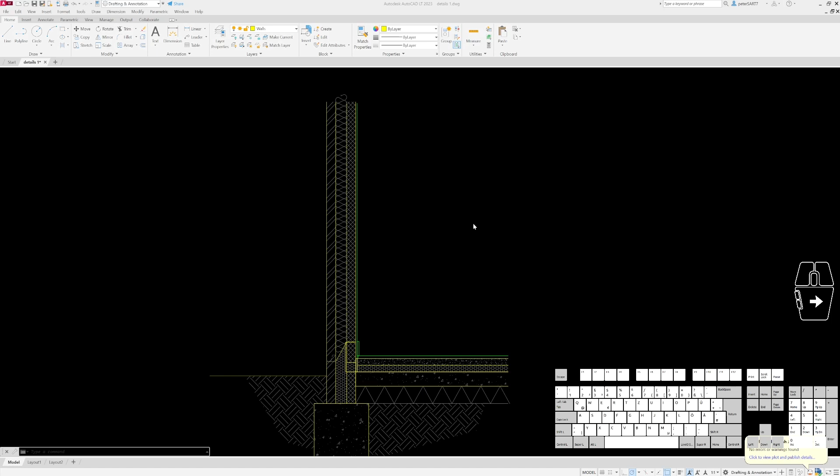This time we're going to look at roofs. There are primarily two types of roofs, a cold roof and a warm roof. And in this one we're going to look at cold roof, so we're just going to draw a very simple pitched cold roof. So bear with me because this one does take a bit of time.

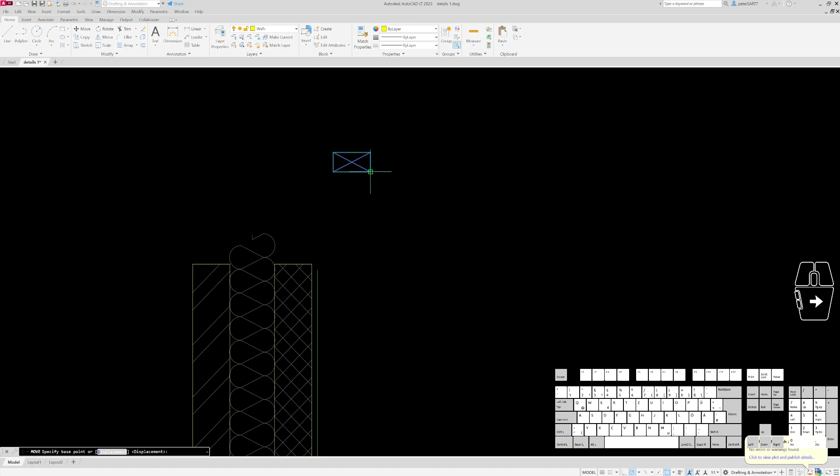So first we're going to cap off our masonry walls. Then we're going to draw a wall plate, 100 by 50. Make it a slightly lighter line weight because it's not masonry. Roof joist, 150 high. It's an elevation, so make that a lighter color. This will be plasterboard. Offset that 15. Draw the end of the joist.

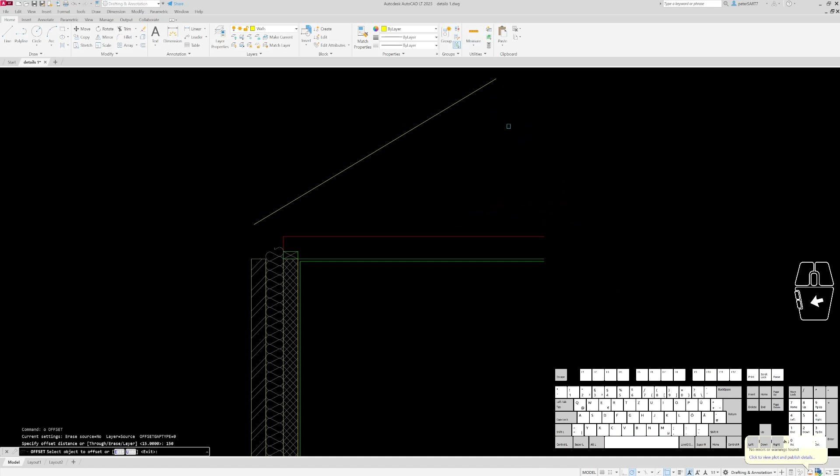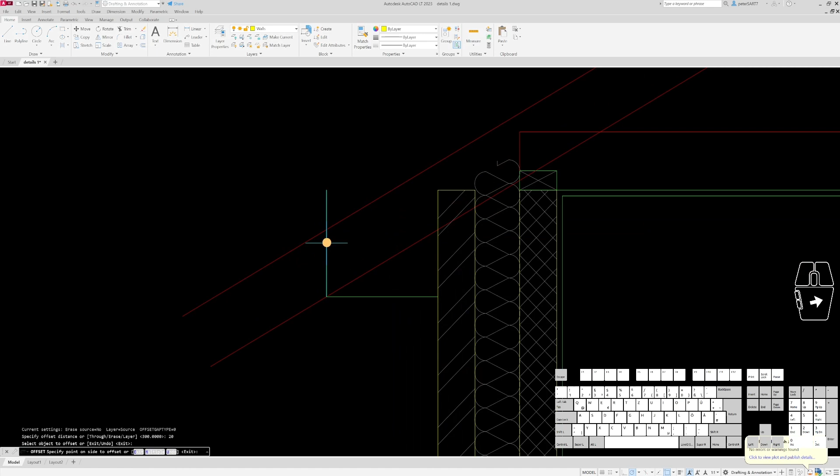Okay, rafter, let's draw that at 30 degrees. Offset that at 150. Sit that there. Just draw a line up here, project that on. Okay, let's say we want a soffit of 300 long. Okay, it's not masonry, make that green. It's going to be about 18 mil thick, so I draw that at 20 mil thick timber. Okay, so the rafter end gets cut like that.

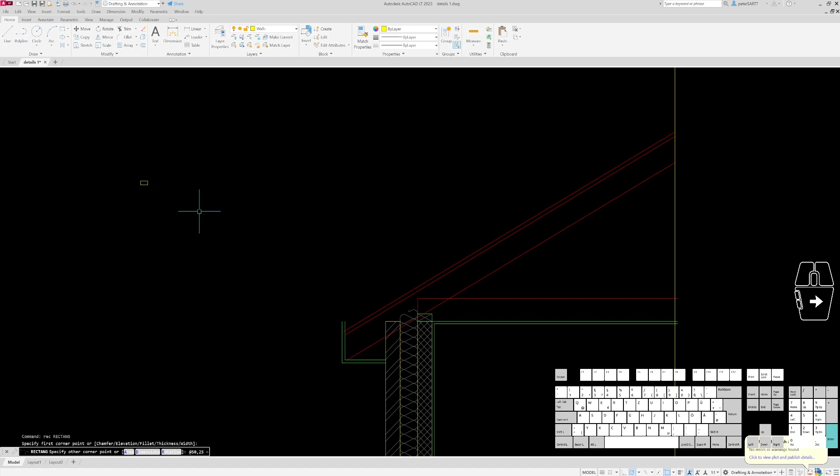Okay, next we're going to offset this rafter by 25 mil. Now those will be 25 mil deep timbers running on top of the rafters. Then over here, we're going to draw 50 by 25 mil tiling battens. Okay, change the line weights, green for the outside and a light color on the inside. Okay, going to copy that, say 350, that would be dependent on your tile size. Let's draw a couple of those. Okay, now going to align that to this roof. Okay.

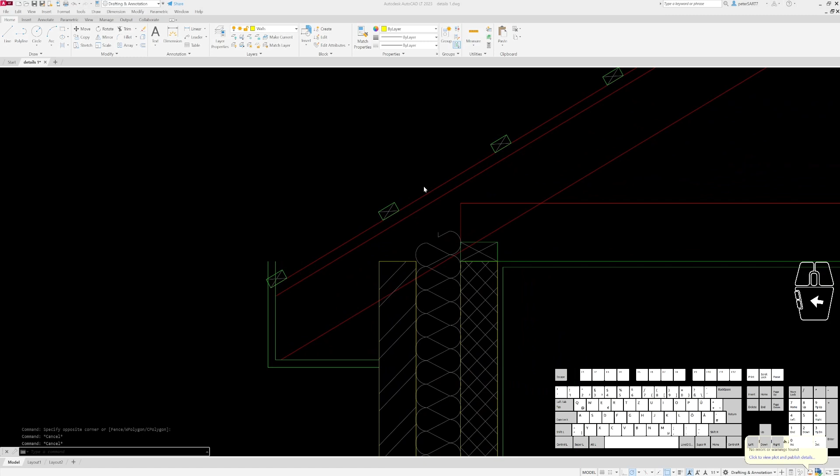Next, we're going to draw a 30 mil thick line for your tiling. We don't need to draw the individual tiles. It's a waste of time. It might look nice, but in the office that would just be a waste of time. Delete this end one here. Okay, next, just going to end this here like that, and this one here like that. Okay, and we're going to go back and adjust these afterwards.

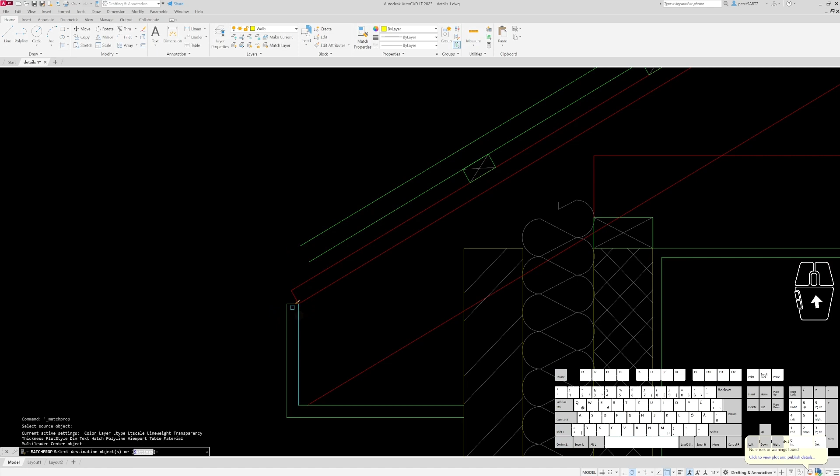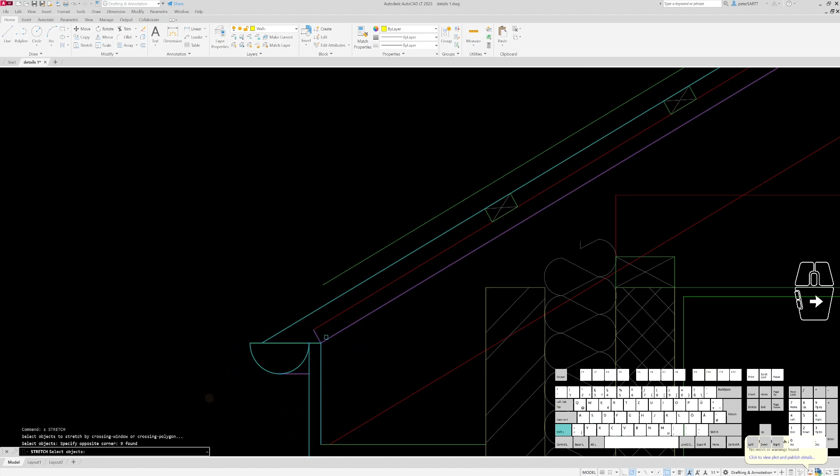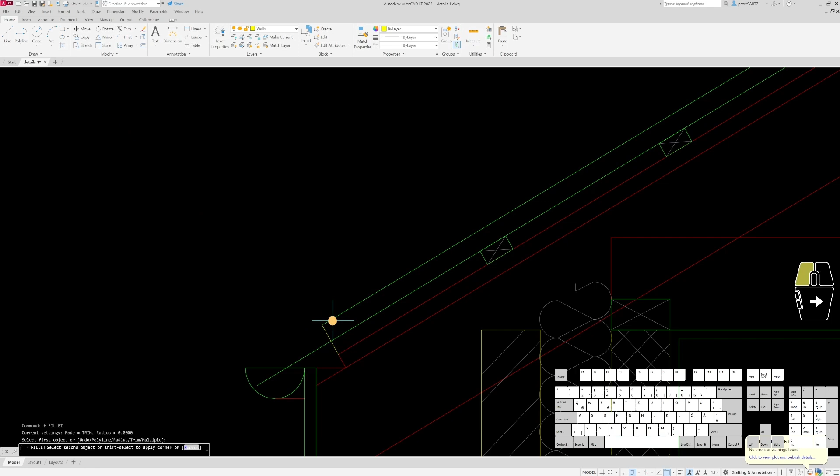Okay, now just to explain, let's offset this line by 10 mil so you can see. This line here is your breather membrane. Okay, now in reality what happens is there's a board that goes down here which directs this breather membrane into your gutter. So let's just move this back down so you can see what I mean. So it's indicative, but what happens is this breather membrane here gets draped into the gutter.

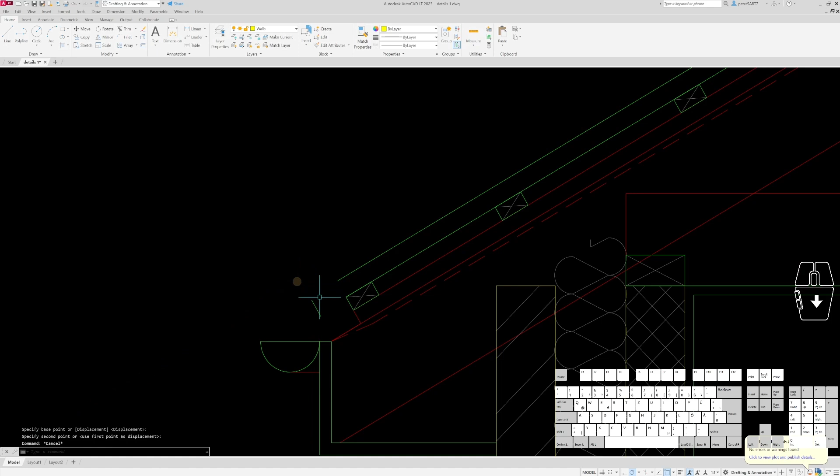This roof tile is extended slightly further on. So this here is a timber batten running all the way along parallel to the roof joist, so air can get in here. Okay, now let's draw some roof insulation. Connect those so you've got a continuous line of insulation.

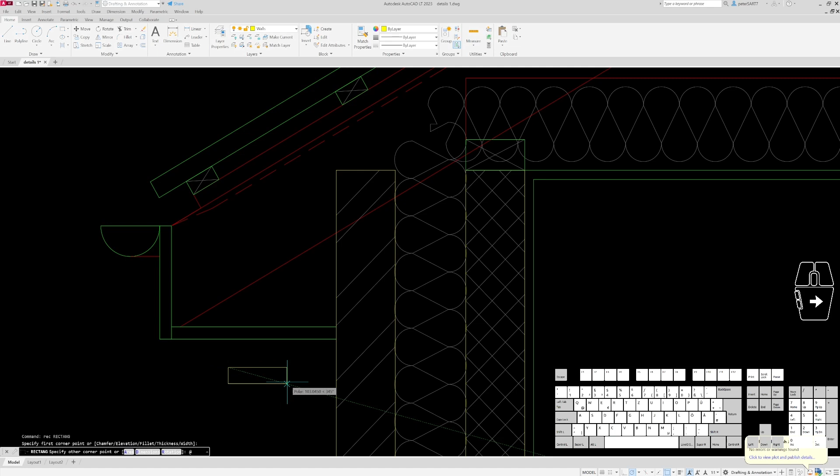Then in your roof soffit, which is this, so this vertical bit's called the fascia, this bit's called the soffit, and you can buy things called soffit vents, which are essentially slots. And what that allows is for air to come into this loft space here, and this loft space is all cold. That's why they call it a cold roof.

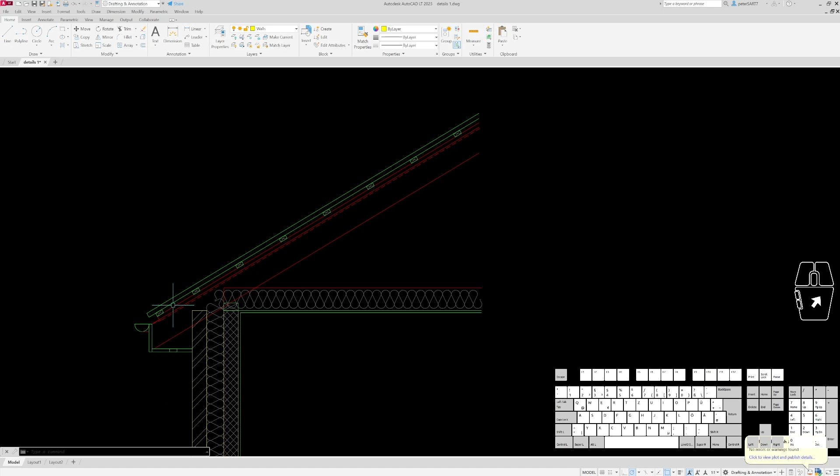So what happens is warm, moist air from inside the house passes through the wall and it passes up into the ceiling. It condensates around this space here, but it gets dried out because this air is constantly circulating through the roof space. So this roof space is cold, and that's why they call it a cold roof. So we're just going to apply some hatches to try and illustrate this a bit better.

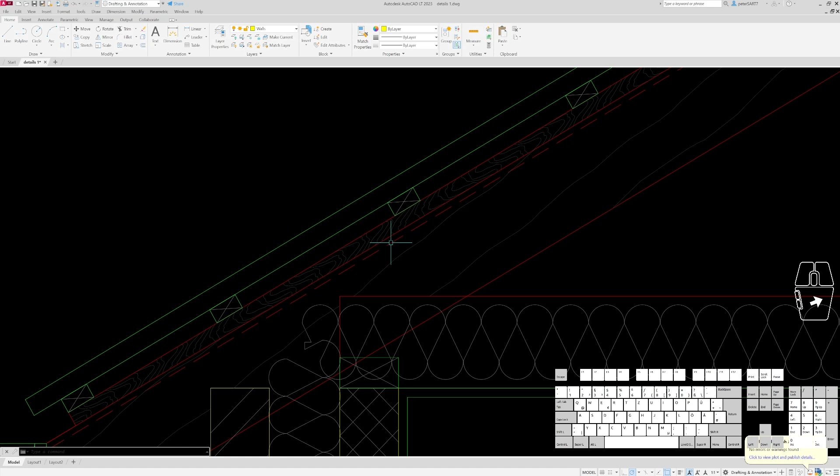So you see these are the rafters running this way. These are timbers which sit on top of the rafters, and that just allows any water that does come through the tiles. So let me put the breather membrane back in. Any water that comes through the tiles, which there won't be a lot of, will hit this breather membrane and can drain underneath these tile battens. Okay, like that, and they'll drain into the gutter. And at this scale, that's all you need to draw.